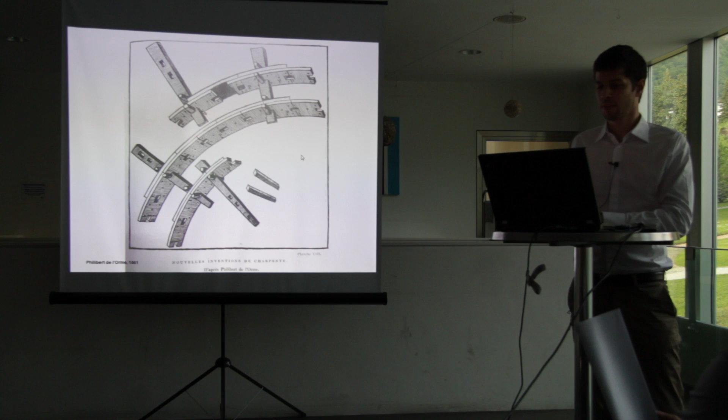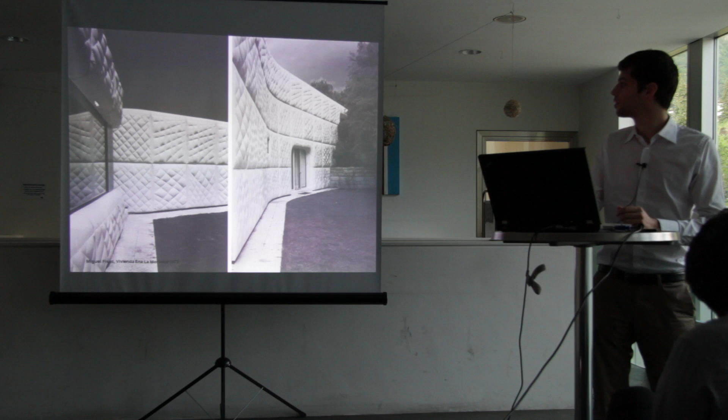And another example where the development of a fabrication process was used purely for the design aesthetic is Miguel Fisac's work from the 70s, where these panels were poured from plaster into a flexible fabric formwork mold with strings beneath the mold, so the fabric bulged into these strings, and these are these pockets you can then see here. So that is purely visual in that case, but he developed this design completely through the invention of a fabrication process.

And when we talk about processes, it's also important to consider the tools with which these processes are made. And we think that a very deep understanding of the fabrication tool you apply is mandatory if you want to work with processes in the design of architecture or architectural artifacts. And a nice example for that are Japanese carpentry apprentices, who first have to develop their own tools for one year before they're allowed to actually work on a workpiece. This is an example I stole from Andrew Kudless.

And today we think that as architects we not only have manufacturers or workmen on the site at our disposal, but we also have a huge array of all types of digital fabrication tools at our disposal. They're just usually hidden behind some obscure processes or submission system. But when we start going out into the industry and look around, we find many very interesting machines that we can either hack or appropriate to our needs. This ranges from a cutting knife, a wood sawmill that is digitally controlled, to robots, to 5-axis milling, to printing.

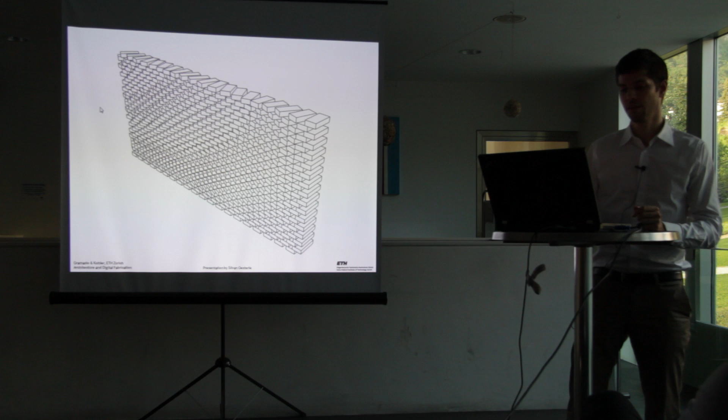So you can test a lot. You just modify your script a little bit, you directly feed it into the machine. You can test your design on a one-to-one scale. And this then sparks new design ideas, generates new potential for the architectural design.

So as I mentioned, we only work with the rotation of the bricks, use the traditional brick bond, and didn't want to transform the wall into something for which bricks were not initially intended. So brick walls, in our opinion, were straight, and that's why we only used rotation. But when you move along the wall, it gradually starts developing a three-dimensional deformation effect, which we really could only see when we were testing that on a one-to-one scale. And this was the final design. So the script you just saw and that wall, this is exactly what it was made from.

We had the nice opportunity then after this project to use the system we developed for the Gantenbein winery in Fläsch, a project by Andrea Deplazes and the professorship I worked for. And there the system was adapted to work with images and was used for the facade of that building that needs a light filtering screen for the wine storage space.

I already want to move on to the next project. This is a teaching project, the second one I taught at ETH. It's a 4 weeks research course, so a pretty limited time frame. And here we asked the students to work with an already developed fabrication process, design through that process, but in addition to that, think about performance requirements like constructive weather protection and insulation inside an exterior building wall.

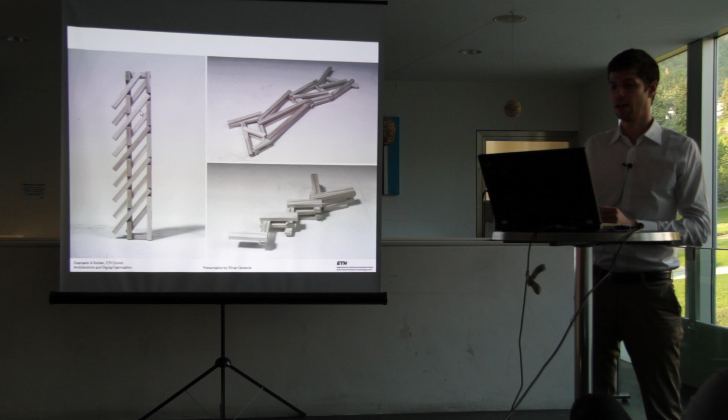And again, the first step in the semester is always to ask the students to develop their own design systems. So what is a design system? Under design system, we understand the kind of scope you can work within. So these models are nice examples of design systems. A certain arrangement of slats that in any case is producible. And then you can start modifying these elements by developing your own program tools.

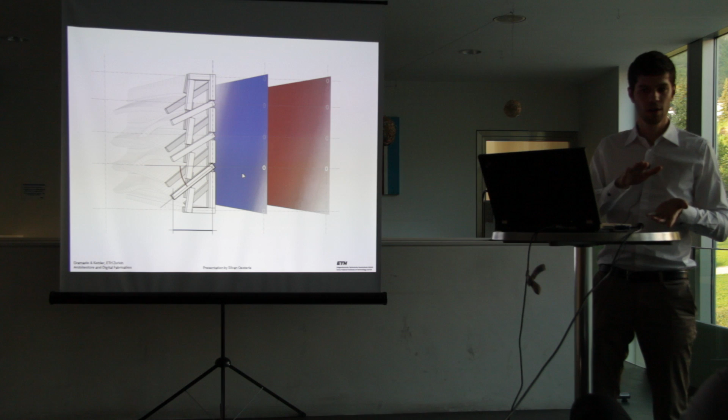So you have a certain system. For example, in that system, the students were able to modify the inclination of the slat and also the length of the slat. And within that system, every solution is producible later on. And now through, for example, the color of a pixel image, they can control these two parameters of the system. And this gives them the possibility to explore a huge range of variation and enhance your design, but also the performance of these walls.

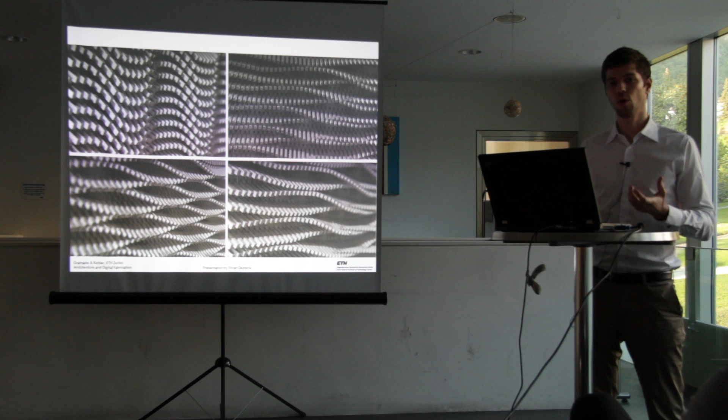So this is in absolute contrast to what Greg Lynn coined as the happy accident, where you generate something in the computer, then you look at the outcome and you search for interesting aspects in the outcome. This is exactly the opposite. You make your system, within that system every solution will work, and then you can explore this wide variety of solutions and enhance your architectural results.

So this group worked with the inclination and the length of the slat. This is the outside of the building shell, so they were arranged so that they shed the water away from the wall, which you can see here, and the face wood is always pointing down, so that there's no fungus infestation on the face wood. And they had to work with all these limitations, so you could only cut the slats straight, no angles, and so on.

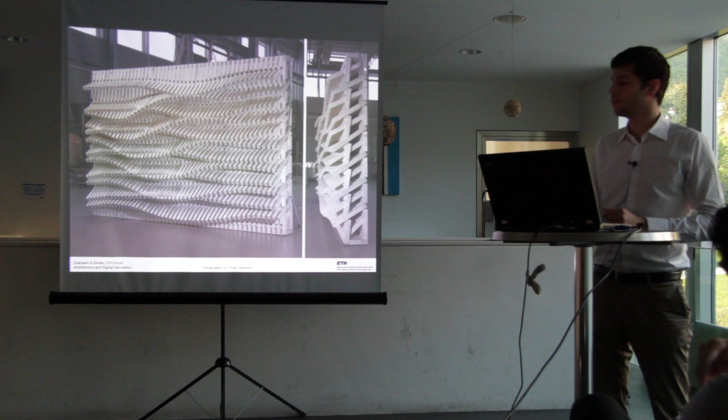And they did many tests with little mock-ups they were watering, fed them back into the design and modified their design so that they can protect the structural parts that are behind this kind of sacrificial layer of slats of the wall. You can see nicely here. This is the vertical load-bearing plate, which is straight in the back. This is the sacrificial layer that sheds the water away, and here on the inside they put insulation, flocking insulation, which is then also protected from water by shedding it away.

On the inside of that wall you get the exact opposite expression than on the outside. You have this very subtle play of the modification of these slats, so they build little waves, and they use this two sides of the same coin approach to give it a specific architectural expression that is absolutely rooted in the fabrication process.

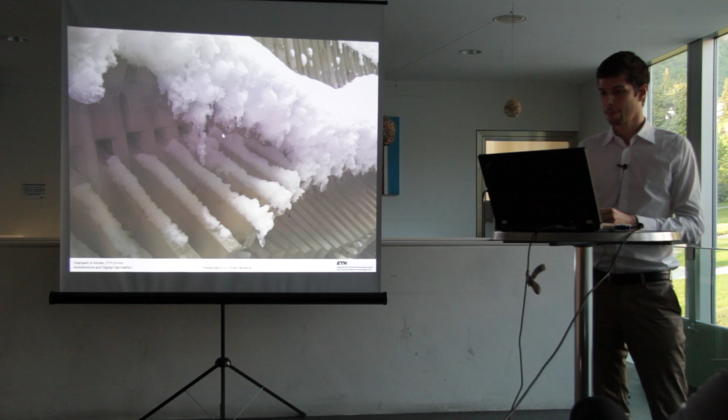As a conclusion, this project is a negotiation between the design intent, the process, and the performance requirements. And the scripted design system allowed the students to have a playful back and forth between the design and the process. With that, I want to move to the next project, which was a research project at ETH Zurich. The project leader was actually my office partner, Michael Knauss.

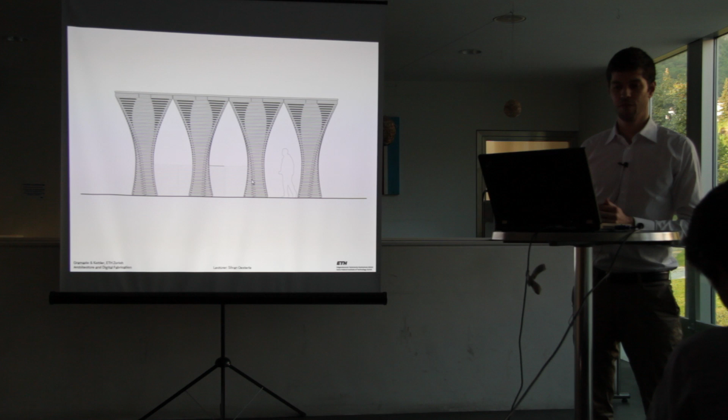It was a small pavilion for the opening of a new highway near Zurich, and it had to incorporate a bar in the center. So here you had a bar, and since it was only for the opening, it was a temporary structure. It was 8 by 8 by 4 meters. In floor plan, it looks like that.

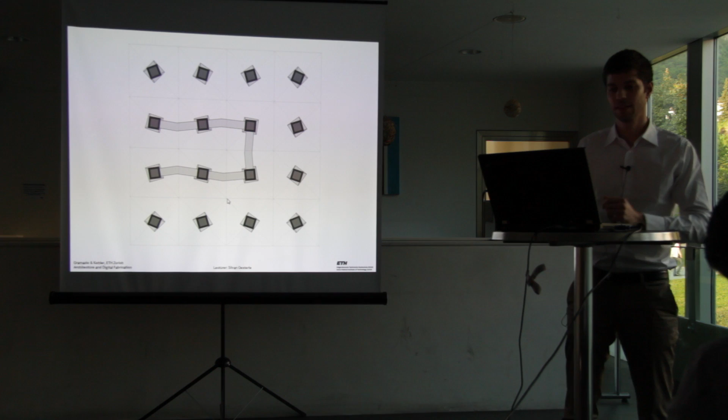And the next important aspect here is that there were process requirements from the fabrication process. There were structural requirements to fulfill. There were environmental conditions to address. And the most important aspect, this is the first time that there was an architectural programmatic approach that required certain spatial conditions to be fulfilled. In a pavilion structure, in a very limited scope, but still you needed to provide enough space around here, you needed to provide enough head space, and then combine that with the actual fabrication process.

So before we get to the result, I want to briefly give you a few ideas of what we were dealing with in that project. One of the important aspects were wind loads, which might sound boring at first, but through the wind loads we had to address the connection technique between the slats. So we were using nailing in the last project, but nails cannot take tractive forces. So when you have wind loads, you get a lot of tractive forces here in these edges, so these edges are pulled just apart when stronger wind load happens.

So we were switching to screwing, because with screws you can then take the tractive forces, but then you have the problem that screws can rip out through the wood like that in the corners, and this is why the overlap here in the corners had to be extended. This will be important later on.

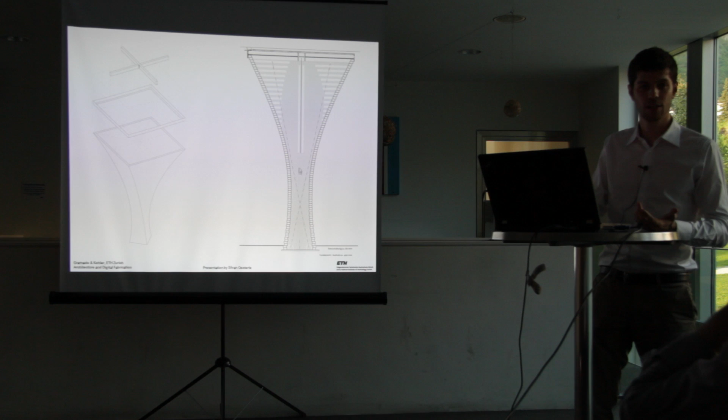Another aspect is that the overlaps and the screwing were not enough for the engineer of record who had to sign the whole thing, and he wanted additional kind of pre-tensioning inside the structure. But the pre-tensioning then caused the trouble of bringing down the pre-tensioning loads here in the center. And this led to the development of this overlap here in the center, where the width of the overlap is defined by the force that is happening at the overlap. And since you add more and more weight towards the bottom of the column, which is upside down actually here, this overlap increases towards the bottom of the column.

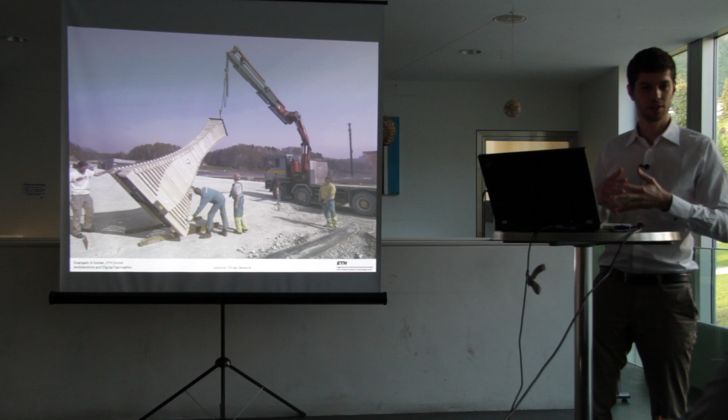And now an important aspect for the spatial design was the twist of these columns. The twist of the columns really opens up the bar towards the inside. It makes an invitational gesture of the pavilion, and it also opens up the headspace for the people moving towards the bar inside the pavilion.

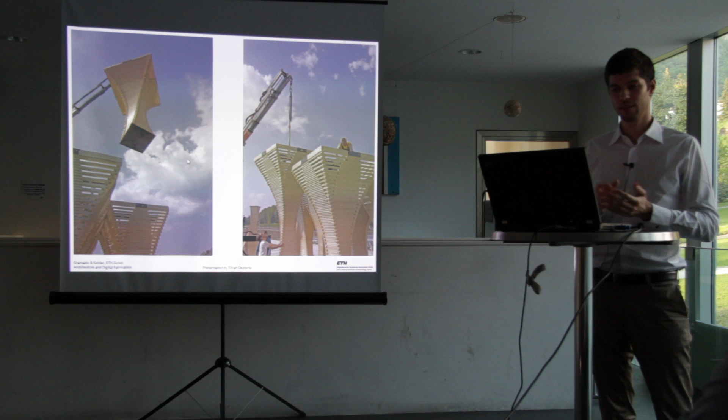And then this again caused trouble with the engineer of record, who said this twist will weaken the structure. And then, by integrating into the design script, because these column structures were again scripted, we integrated very, very simple graphic static calculations. So we were able to show that the forces in each of these connections are actually the same for a twisting column as for only a bending column.

And this was important because normal structural calculation software doesn't work with these elements. They just assume four solid walls, for example, and that's why they need so much bracing and stuff. But you still need structural engineers that sign off your projects in the end. And by doing so, we could convince the engineer that with our qualitative, not quantitative calculations, he can be sure that the values are the same for both solutions.

And so now I want to come back to why all these technical factors are so important for the design. We're not trying to see these technical factors as limitations that destroy your original design idea, but we try to pull them into the front of the design process, integrate them, and then make a more interesting architectural result out of them. So for example, we exaggerated the overlap of the slats in the corners. We did not want to do away with the overlap, but we even increased it in order to show that this is not a surface design, and to visually increase the twisting effect of the columns.

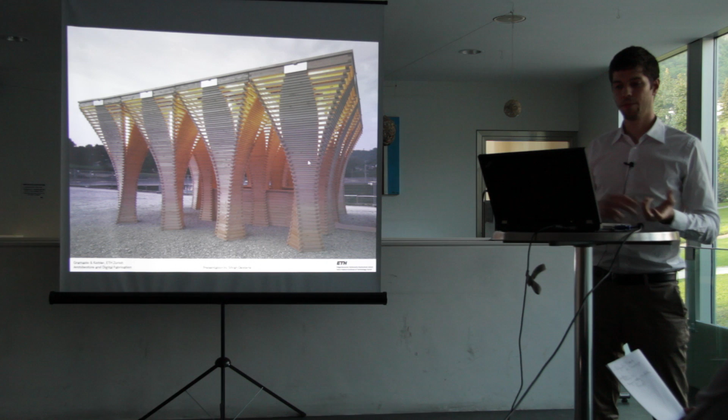So this is the corners. The second important aspect was this load path, bringing down the vertical loads from the pre-tensioning. This was integrated with the lighting concept of the structure, and then became this almost structural ornament here in the center of the column. So we always try to combine architectural aspects with performance requirements and fabrication requirements, and generate an interplay between them in order to achieve a more meaningful result.

So as a conclusion from that project, by adapting the fabrication process to work with screws, we were able to open up new design possibilities, so deal with tractive forces, which made this structure possible at all. And the second, more important aspect is that designing with and for fabrication and integrating the performance requirements really allowed us to open up possibilities which we wouldn't have thought of before.

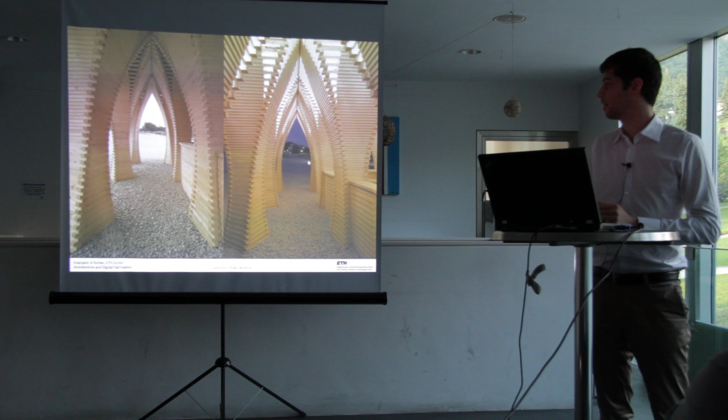So in the first place, these were only surfaces in a Rhino model, which was way less interesting than having these overlaps of the slats and the light shining through the structure. This was all triggered by having knowledge about these requirements already at the beginning of the design process.

So we hope also that the very close collaboration between architects and engineers within the process, and the exchange and communication, which can be enhanced, for example, by writing your own software, can leverage new potential for the design.

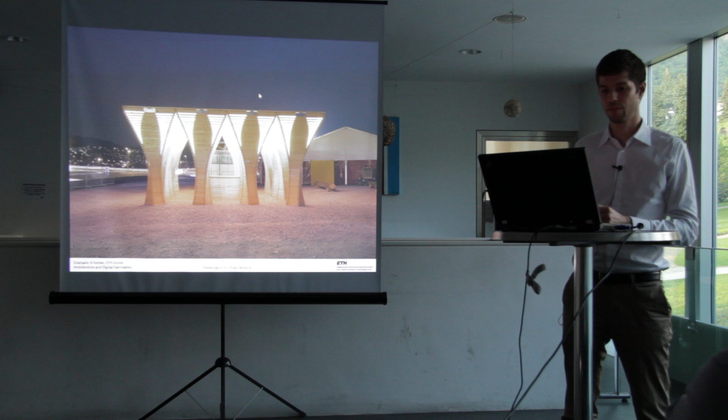So this will get me to the first project from our office, ROK. We're actually a very young office. We set up the office 1.5 years ago, or even less, a year ago. And the first project is something we did before the office time. It was a competition for the Arch Plus magazine, which we were lucky to win.

And the competition asked for the development of the fabrication process and then designing with this process. And so here we had a perfect back and forth between process and design. I will briefly explain what we used as a process. It is based on a geometric property of unfolding geometry when it has zero Gaussian curvature.

So this is fairly technical, but just think of geometry in the form of cylinders or cones, which you can take and fold from a piece of paper. So you can bend a piece of paper into these shapes. And you can also do this with more complex surface arrangements as soon as you pay attention to the fact that all lines going from every point on the surface focus in one point in space. You could also do that via optimization, but we thought taking this property and integrating it with a design tool is more interesting, because then everything we generate is already producible.

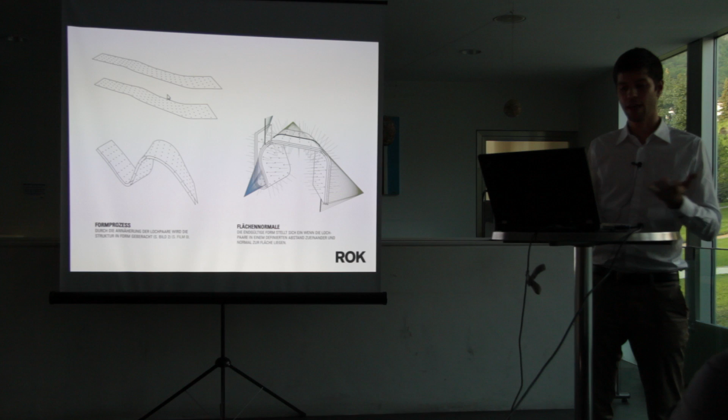This is combined with an actual fabrication system. So when you have your surface that you can fold into a flat sheet material, you do not really know how to generate the shape. So these surfaces are perforated in 3 dimensions. Then they're unfolded with the whole perforation pattern. And when you now pull these 2 surfaces together again, you get back to your original shape.

So this is shown here. This is an unfolded perforated panel. We then pull these panels together with these strips and spacers in between, and this then gives the shape that was originally developed in the digital model. At first, we intended to use this as a formwork for concrete pouring. I did a first prototype with that, but we soon wanted to explore more interesting applications, because the concrete pouring was kind of limited due to the spacers. So this did not fully make sense.

So we looked more into facades, and later on I'll show also structural applications, because we wanted to make a design with it. And this was how the development of this process was informed. We developed 2 systems, a heterogeneous connection system, where the connection is made from an additional part, and a system-inherent connection system, where the connection is made from the material itself that we used for bending. I will briefly explain the heterogeneous connections, so for example screws or these strips.

And at that point we started a collaboration with facade manufacturer Seele from Germany, and they started to support this research. So they were providing us with machines and also knowledge about facade building. So we did a first prototype with these heterogeneous connections, where the important parameters were the bending radii limits that such metal panels impose, and the construction limitations, that is just the time that it requires to pull together these panels.

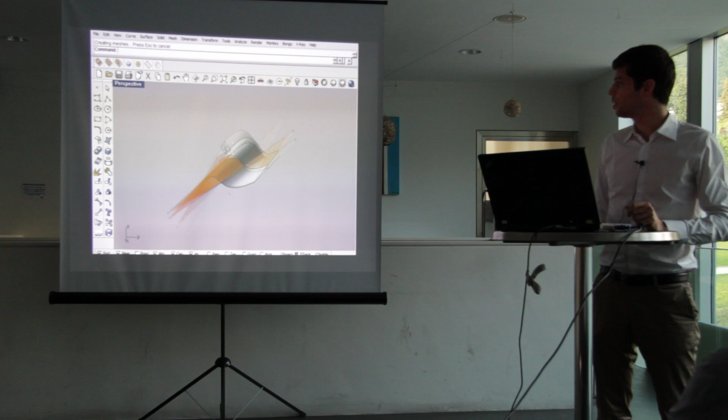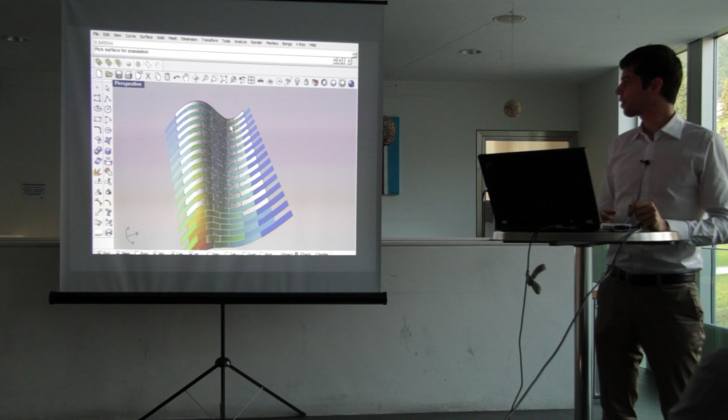To give you an idea how these panels are generated. So we now see everything that I explained so far in one video. This is the software tool we developed in Rhino, with which you can generate panels that are always unfoldable. So this is a very simple approach. As I said, you can do that with arbitrary geometrical shapes via optimization, but for that project we liked the direct approach. So by clicking your way through space on these extension lines, you ensure the unfoldability. Then the bending radii are analyzed, and we chose the most strongly bending panel for the first prototype.

Then the tool generates all the machining data, like the hole pattern, and also the screws for it, everything necessary to fabricate it, and then it unfolds it into a flat panel, which you can see here on the left-hand side, generates the hole pattern, and this is then given to Seele for manufacturing.

At that time, we had a lot of time, so we also developed tools to really bring together these metal pieces, because it's not so trivial anymore to bend a 2mm stainless steel plate. So we developed our own physical tools to do that. And with that, we were able to make a first prototype. This you will see here.

So this was the piece for the first prototype, where also the overlaps are an important factor in order to ensure curvature continuity of the facade panels. Why Seele was so interested in the process is that bending very thin sheet material stiffens the sheet material in itself, and by that, with thinner material, you can cope with higher wind loads on facades.

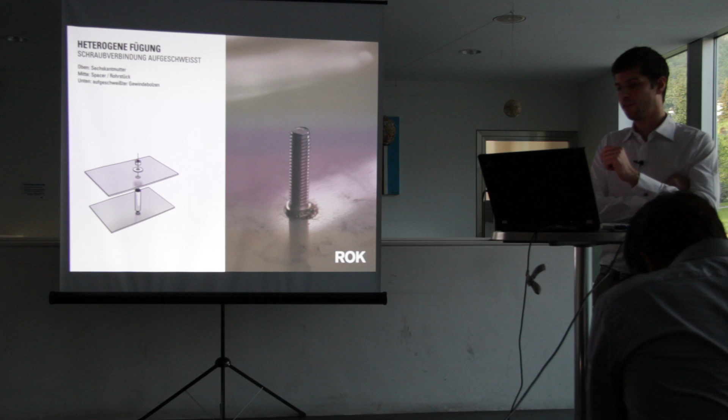So here you see the construction of this first panel, which is still quite work intensive, so this is something probably to automate. And the first prototype used screws sticking through the material, but then we switched back to bolts, which allows us to give a really seamless surface for an outer facade panel.

We set up a collaboration with ILEK. This is the Structural Engineering Institute where Frei Otto formerly worked, which is now led by Werner Sobek in Stuttgart. And with them, we wanted to research how these panels could perform structurally. So the first thing to research was the orientation of the clips.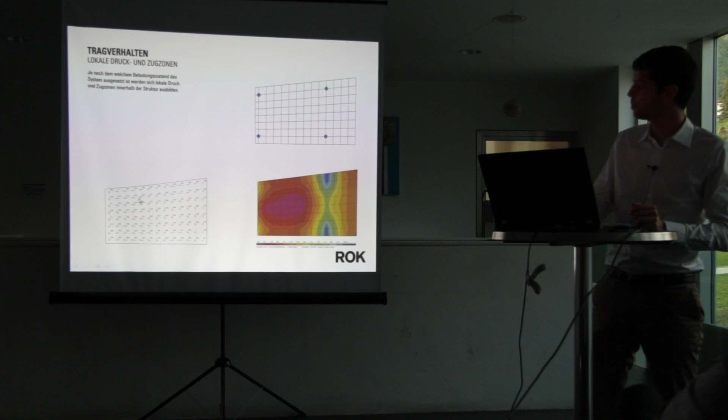And by orienting the clips towards what you can see here, or against the main stress axes, you can further stiffen the panel. So the orientation is based on the compression or tension, and the orientation or the rotation is based on the main stress axis.

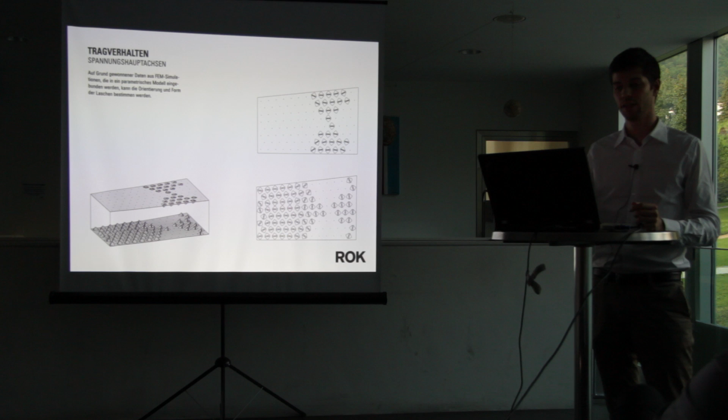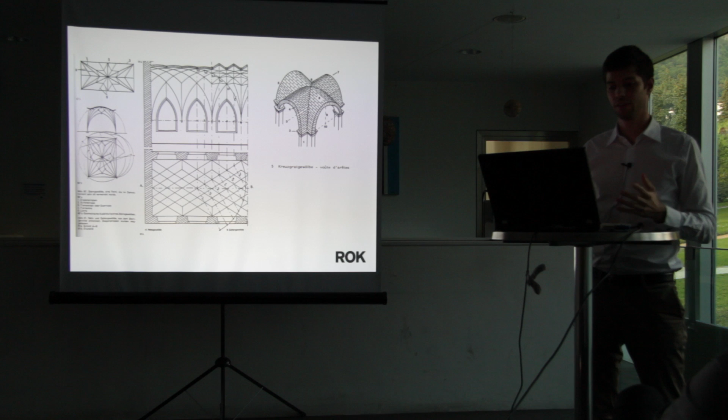And this formed the basis for our design development of a pavilion, because the final hand-in for the competition needed to be an architectural structure developed with your process. And for the development of the design, then we looked into existing structures that operate with cylinders and cones or combinations of both. And traditional vaulting structures generate very sophisticated results with this approach. In an abstract way, this is what you can see here.

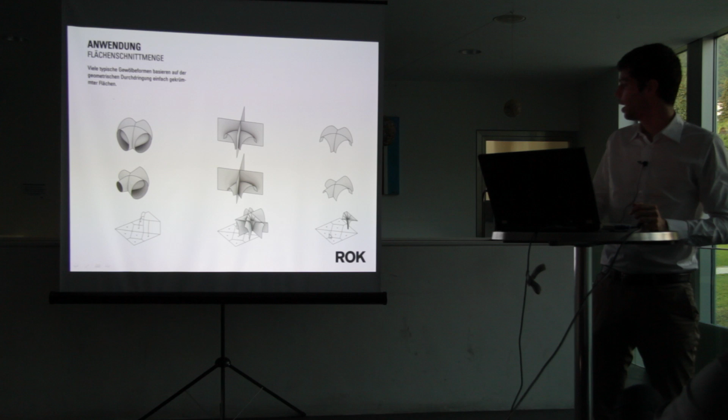All cones and cylinders have zero Gaussian curvature. And when you intersect them in certain ways, you can generate very interesting vaulting results. We combined that with the analysis of the structure in order to decide where the clips have to go. So we compare the cone generated form, which is this line you can see here, as in a section of the panel, with the ideal catenary shape.

The catenary shape would give you only compression forces inside the structure, but we cannot do that because then we could not produce the panels anymore. So this is how we were able to determine where we have compression and where we have tension in the structure, and place the holes accordingly. So we did not have to have any complex static analysis, but could do that with very simple means.

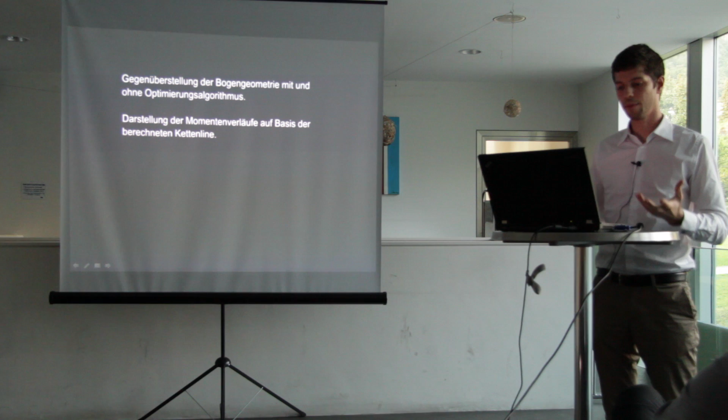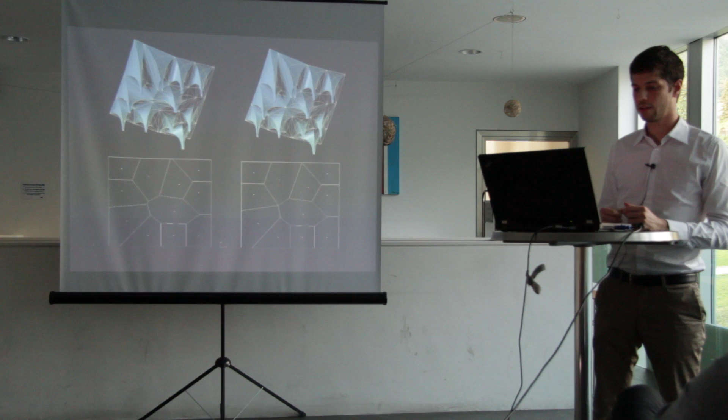And this will demonstrate the design system that we set up to make our final pavilion. So here you can see these diagrams with which we could move the points around, and then the structures adjust to it. So within this system, every solution is a buildable and structurally feasible solution. So we could now start developing our designs through that. And there is now again a huge range of possible design variations. So this was the analysis I talked about just a slide ago.

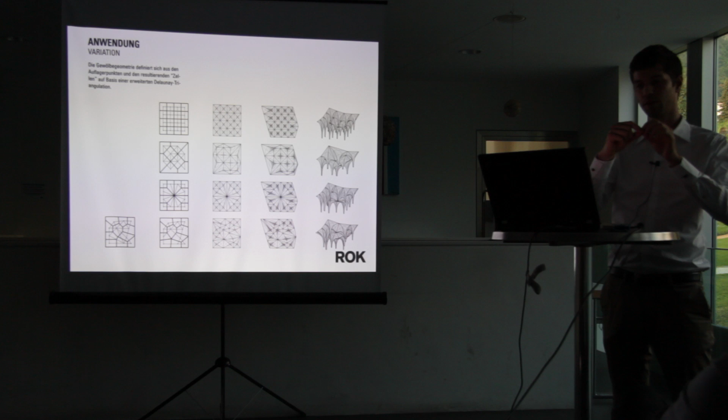Here you can see different approaches. So it is possible to move the base of these columns. It is possible to move the upper corners. It is possible to move the outside corners. And we chose a fairly complex site where we have height differences, and also connecting to existing buildings, so that we could really demonstrate the potential of the fabrication system, the design system we developed.

So this is a very systematic approach to architecture, but then again we use it to generate interesting architectural effects. So for example, the light patterns that emerge from the clip placement on the floor, or the clip placement patterns themselves, this is the top roof view, are the design expressions that are generated by this process development. So we again try to not push through a design idea initially conceived, but play with the development of the process in order to make an architectural design.

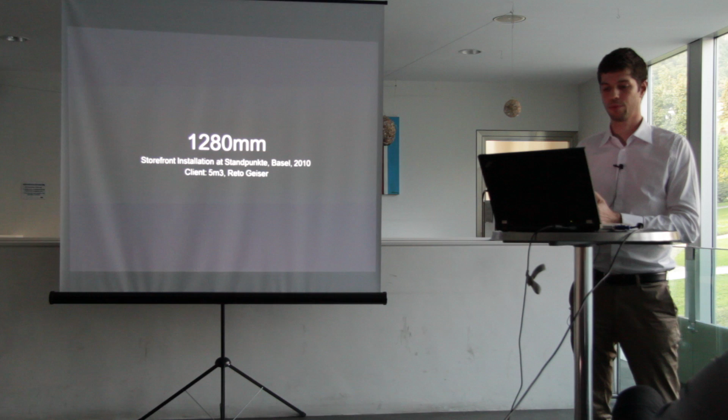This is a model we built in the end. And this is almost now at the center of this diagram, where the architectural design development and the process development went hand in hand. And in the next project, they become really the same. So the architectural concept and also the fabrication process are really the same thing. And this is a very rare kind of happening, I would say, and it's probably only possible in a certain scale or scope of projects.

So it was an installation for a gallery in Basel, where we were asked to do something with the interstitial window space. So they had a 1 or 1.5 meter deep shop window for which we should make an installation. The design idea, an architectural design concept, was a play with the title of the lecture series this gallery is hosting. This lecture series is called Standpunkte in German, which in English is point of view. So we started to work with that idea of the central perspective, and used the storefront as the projection plane for the focal point.

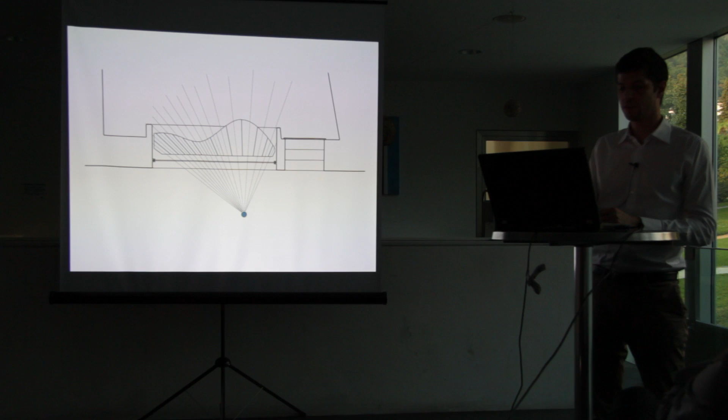So point of view or focal point was the architectural concept, and this is a top view, and here you have the sidewalk. And within one point at the sidewalk, we focus all of the kinks and all of the lines inside the structure. And by doing so, when you walk into this focal point, the installation completely dissolves. So you only see the front sides, and you get a clear view into the gallery space. And when you then gradually move away out of that point, the installation starts closing off the view inside the gallery. And when you're looking at it from the side, it appears as a completely solid installation.

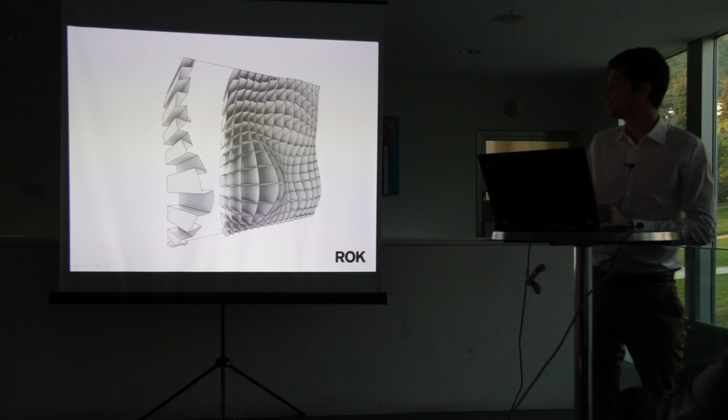We were also looking very much into the fabrication of this structure. To really get this idea to work perfectly, we needed a thin material being connected as little as possible, so that when you're in the focal point, you get a clear view and are not obstructed by any connection or construction techniques. We also, in that case, used this focal point idea for the fabrication, because when we focus all lines, we can do the same thing again. We can unfold these panels and then fabricate them very easily from flat sheet material with a standard cutting knife.

Machine available to us at ETH, so this project was supported by the Rapid Prototyping Laboratory there. They allowed us to use the machine for free, which was very generous, because these small projects don't have a budget. So you basically get paid for the material and a little bit extra, and then you have to see how you make something interesting out of it. And these limitations of budgets also play into the connection system. We used simple paper clips to connect the folded strips at this one single overlap.

And by doing so, we were able to work within these very limited budget constraints. On the inside, you get kind of the opposite effect. You get a light effect, a light gradient towards the focal point. You look always towards that point on the sidewalk. Although the structure seems to be pretty solid, it still transmits a lot of light into the gallery space.

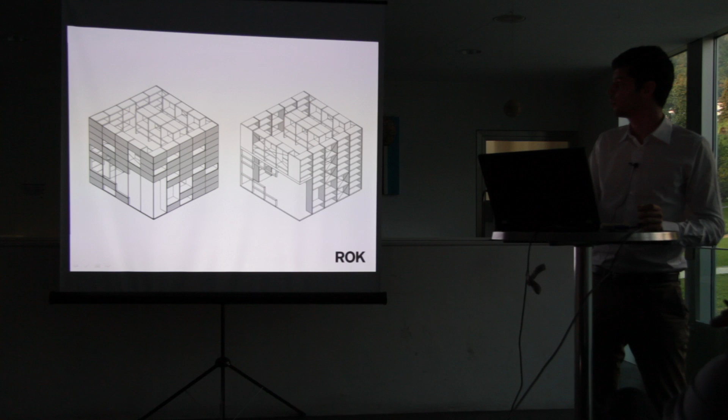So the whole structure was conceived as basically one huge shelf, which has openings in certain parts. So here you can see the shelving structure, which is the structure itself, and then showing the models in certain spaces. What we did here in order to deal with these very limited constraints but still make an interesting result, we implemented, because we knew about the whole fabrication process.

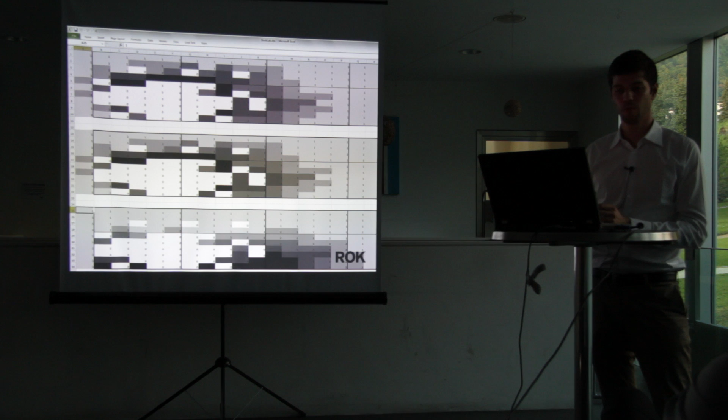There was a carpentry available to us who had a setup procedure to make these shelves, but then we didn't know how much, because glass costs more than the enclosed facade, and so on. And we input these parameters into a simple Excel spreadsheet that was connected to the geometric model, and then we could modify the amount of openings, the placement of openings, and immediately see what that would mean for the timing and for the budget.

So we tweaked that to gain a maximum of openings, because we want to exhibit as many models as possible, and also to limit the timing for the construction. So it was possible through the whole prefabrication chain that followed this design to build it up within 1 week, and this was also another constraint that we had to work within. And we could already see that while designing inside the Excel spreadsheet, and that was the important fact, because otherwise we probably would have lost a lot of the openings that we now have. And it's still not many, but at least a few.

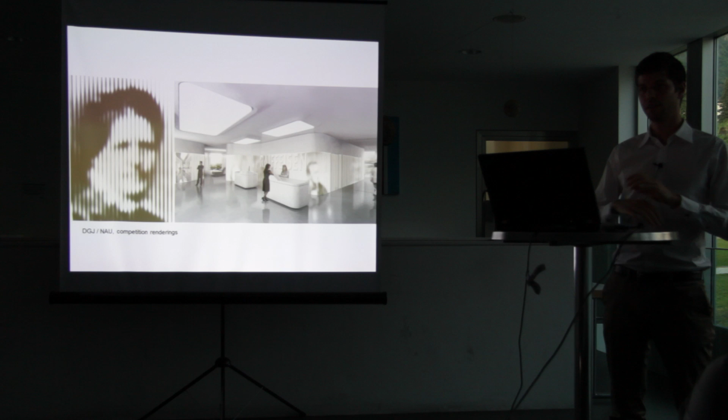So we had rather limited design freedom. We only had freedom to develop the detailing system, not the design. So this is kind of the last step where we were still involved in a very tiny part of design decisions. So we proposed many different approaches of how you could materialize the images, like for example cutting wood slats that are normal to the facade surface, thus showing the images on the facades.

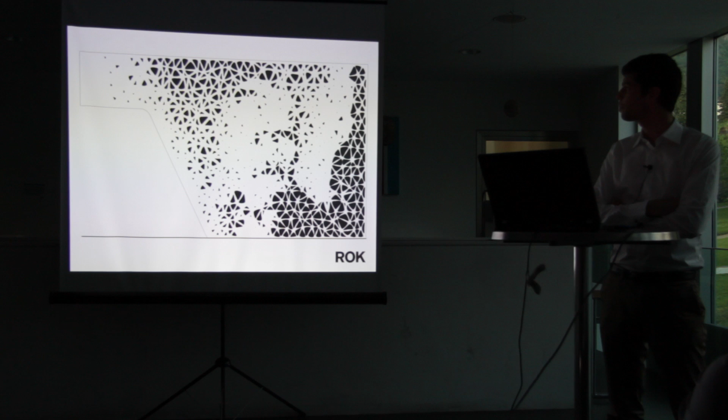Actually, these images are persons that lived in the area around the bank, and then this was another system that we proposed, which is just simply cutting holes into panels. And this was then the one they selected. And we made many variations of that, a whole plethora of more complex or less complex arrangements, testing when do you still see the facial patterns, when do you not see them anymore. This was kind of a play with abstraction and less abstraction.

And then we soon tried to also think about the materialization of that, how you could play with the detailing. So for example, do we use angles for the corners? How does that affect the lighting from the back of the structure? How does it affect the shadow play? And for that it was crucial that we did early prototypes, and DGJ had a good contractor they were used to working with, and this contractor, already very early in the design process, allowed us to do tests. And these tests were crucial not only for the detailing, but also for the resolution of these panels.

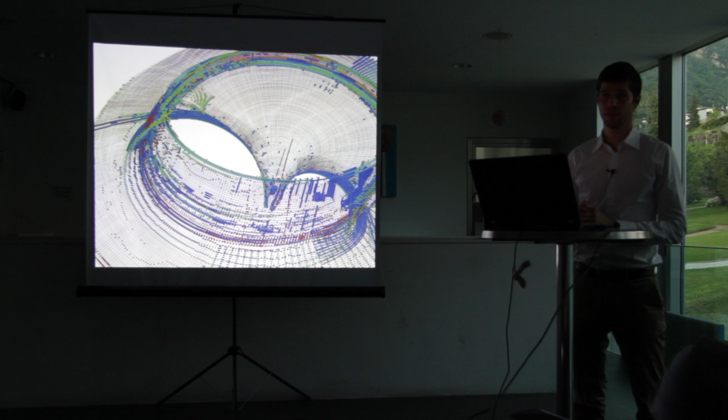And over the years, the project has been modified a lot, and also the engineers changed. Frei Otto, unfortunately, is not anymore in the project team. He's opposing the project now. The engineers of record are now Sobek engineers, and we have been commissioned by them to do the reinforcement planning for this project. So this is pretty dry technical stuff now. But it also taught us a lot about actual building processes and the real-world conditions you're actually working in.

And we, as an office, were responsible for 4 parts of the whole project. So this was the generation of the reinforcement. This was the geometry management. So we managed the whole geometry of this reinforcement model. Then we optimized it, we rationalized it for construction, and we did the quality control in the end. What this all means, I'll briefly explain in the following slides.

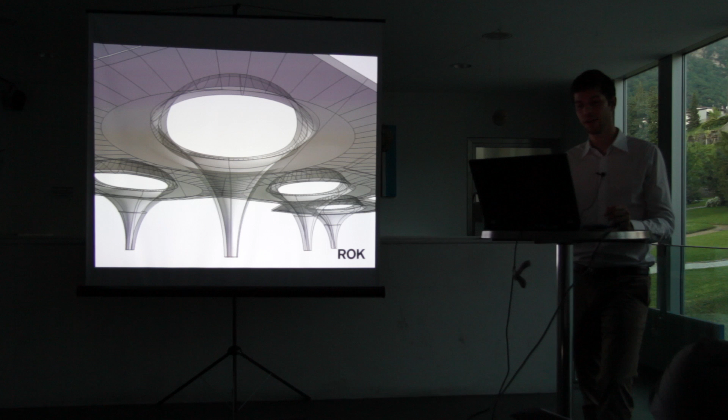So the generation of the reinforcement is based on very simple input geometry. This is basically the form that Ingenhoven Architects shaped in MicroStation. Then we get this shape from the engineer Sobek, and we get a huge pile of rules how the reinforcement has to be laid out inside the structure so that all the structural criteria are fulfilled. To give you an idea about the scope of the project, I'll show a short video which shows the generation of the reinforcement for one of these columns. So inside one of these columns we have around 28,000 reinforcement elements. So this is the generation of these reinforcement elements based on the input geometry and the rules by the engineers.

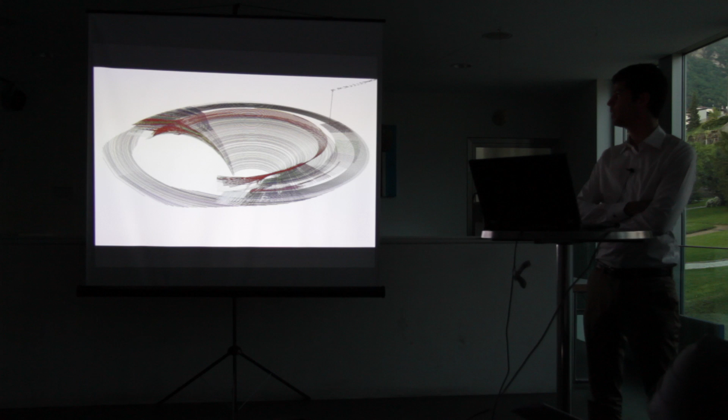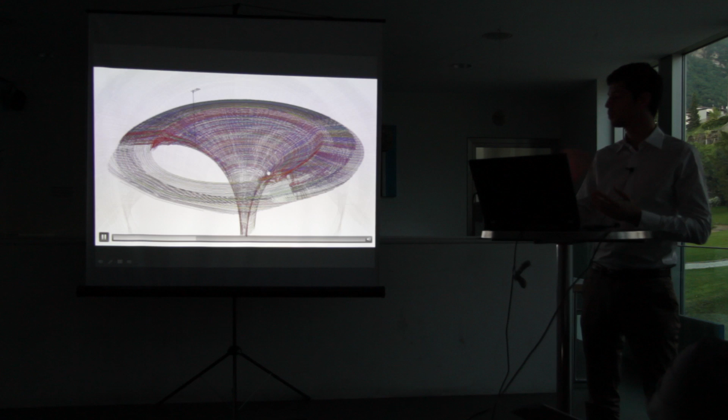There are many different areas where different types of generations then are required. So for example, building phasing, you can see here, so there is a phase in the construction process that stops here and continues above here. There are special elements like clips and ending conditions. There are very high curvature areas, also very low curvature areas. All these different types of geometries require different approaches for generating the reinforcement.

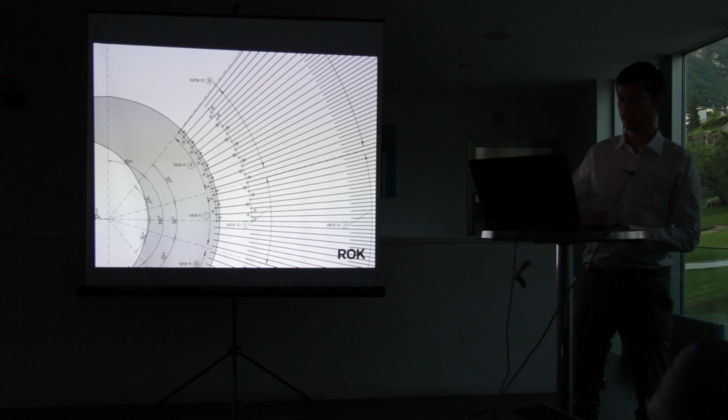The second aspect of our work was managing this huge amount of data. You have 28,000 bars per element. Then you have to apply this to all types of different elements. All these columns are different. They look the same, but the station has a roof inclination, so these columns are all different. Then you have all types of different parts, special parts.

And the nice thing now is that we don't develop a parametric model, because a parametric model would be only applicable to one specific geometry, which basically has always the same topology. So you could not apply a parametric model from this surface to that surface. This would just fail. But with the algorithmic approach that we are taking, it is possible to transfer the algorithms, sometimes with very minor modifications, from one totally different piece of geometry to another piece of geometry.

Parametric models prohibit that, because you build up a parametric model like a tree. So you have a basis and you build your stuff from that basis onwards. And now when you exchange the basis, your model usually doesn't work anymore. But if you only work with parameters in an algorithm, you can adjust it. That's why we are also supporting algorithmic approaches, at least in that type of work, over parametric modeling, which can be very useful in other aspects of a design or a construction process.

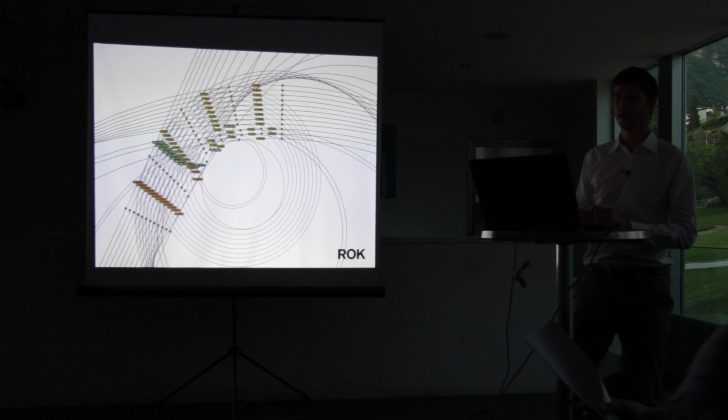So the second optimization, for example, is simplification into arches. Then we had a whole set of tolerance rules. So some bars, for example, don't need bending at all, because they would lower themselves into place. So within the tolerances, you try to take these bars out of the whole bent batch of bars. And one of the last steps for us was the rationalization of the geometry.

Again, with these many elements, it is very difficult later on for construction logistics. So when you go on site, I don't know the actual number, but they have more than 40 manufacturers making these bars. And this building is constructed over a time period, I think, of 6 to 7 years. So these need to be delivered at the right point in time to the right location with the right bending radii and so on.

So you somehow need to group these bars into construction phasing and also into similar types of geometry, because one manufacturer is best only doing one type of curvature. So again, within tolerances that were allowed to us by the engineers, we're trying to make as many bars as similar or the same as possible.

So all the same colors here, all green bars, they're widely distributed through the whole thing, but all the green bars have the same curvature and also the same length within tolerances. And this will facilitate the building logistics later on.

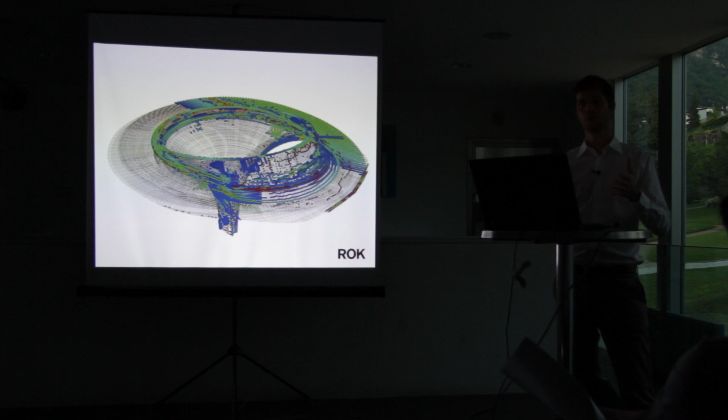And the last step we were responsible for was the quality control. So we had all these rules from the engineer, which was almost a small folder full of rules. And how do we ensure that we don't make a mistake? Because insurance for such a project you cannot pay for, so you better make no mistakes. And this is why we also took over our own quality control, and the quality control in that case for the engineers.

And this has been done by having one person work on the generation and optimization, and another person completely independently work on the control of the rules. So both got the same batch of rules. The one writes checks, the other one writes the generation. And then these checking rules go through the geometry that has been generated and control if everything is according to rules. So this is what you can see here. These dots show if the results fit the rules.

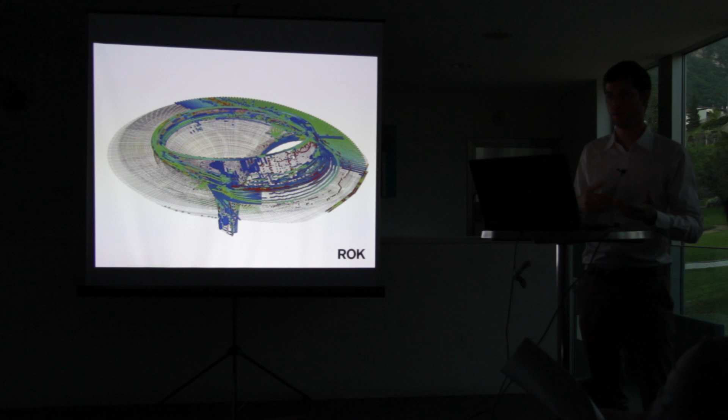So where you have red dots, these are areas you better look into and evaluate visually. Because sometimes, for example, we are outside what is allowed within tolerances, but then the engineers have a closer look at that area and they say it's okay, never mind, because in that area the forces are anyway not so strong in that direction, whatever. This is a part we don't know, but then you have a tool to evaluate the results.

And again, I want to end this talk with this last slide and again mention why we think that algorithmic approaches are so important, because on the one hand, as towards the beginning of the talk, they allow you to rapidly adapt to different design approaches. They allow you to rapidly adapt to different fabrication processes.

You can jump back and forth very quickly without changing complex models, without changing complex arrangements of geometry. And the other important aspect for the consulting work is that they allow you to generate the results again and again very quickly with different types of input.

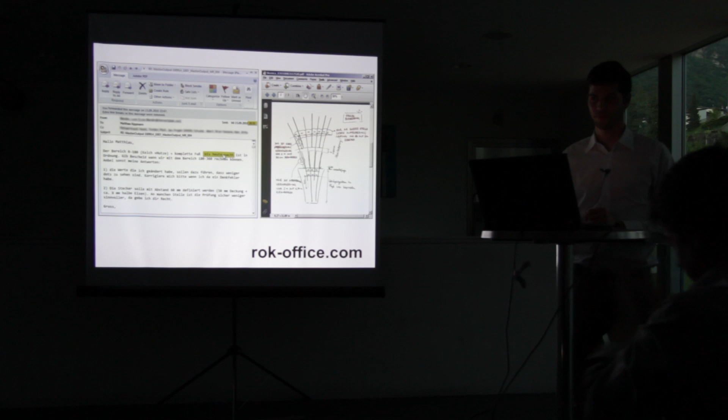Looking at your work, it seems like there's way more than architectural design. There's a lot of scripting and engineering. But you came out of architecture school, so I wonder where all that knowledge about scripting and engineering comes from. I don't think we have it in school. I don't know if you get it from ETH, but where did you get the knowledge from these two big fields? Yeah, well, basically the brick wall project that I

showed, that was one design studio I did before, but there we did it on our own. The brick wall project was what sparked the interest in such technologies. But then there is not much more offered. It's basically teaching it to yourself. It's learning by doing, right? Yeah, we're kind of technology fetishists. So we really love that, and we developed that skill set by doing projects in university, but then also after university. Like the Arch Plus competition, that was when we were working as research assistants, which gave us the time to do such explorations.

But I think it's not too difficult, to be honest. It has a very steep learning curve. You just need to get started. But if you started at one point and you're enthusiastic about it, I think everybody can learn it, because programming today is not so difficult anymore. It's not like in former days when you had to deal with all the details of a computer in order to do programming. You basically open Rhino and then you have a lot of different technologies available with which you can do that. You can use scripting, which is very simple, very good for beginners, but you can also go deeper and develop plugins for Rhino and so on. So there's no limitation to the level of complexity and ease of learning.